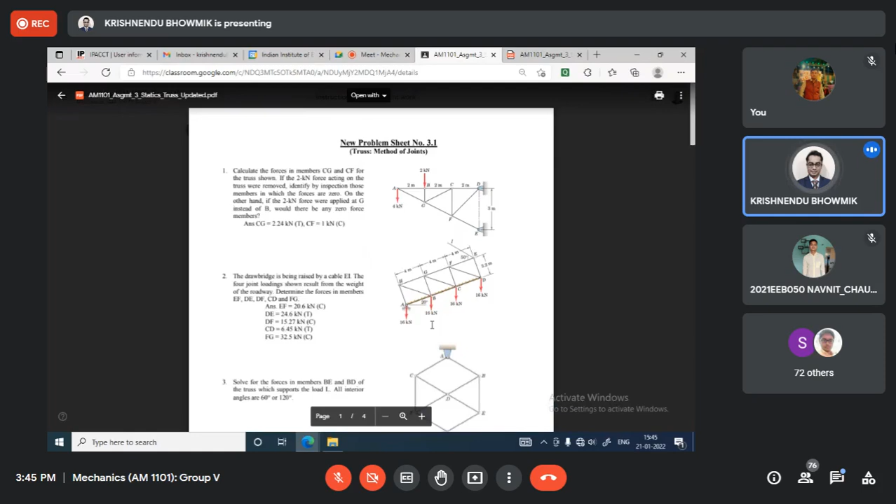So what I have given you for 3.1, this one, yesterday I gave the updated version. Actually it is 5.2 here, and it's supposed to be 6.4. By mistake it was 5.2. What happened is, in an earlier exam, we changed the data to 5.2, but to match these results, it should actually be 6.4.

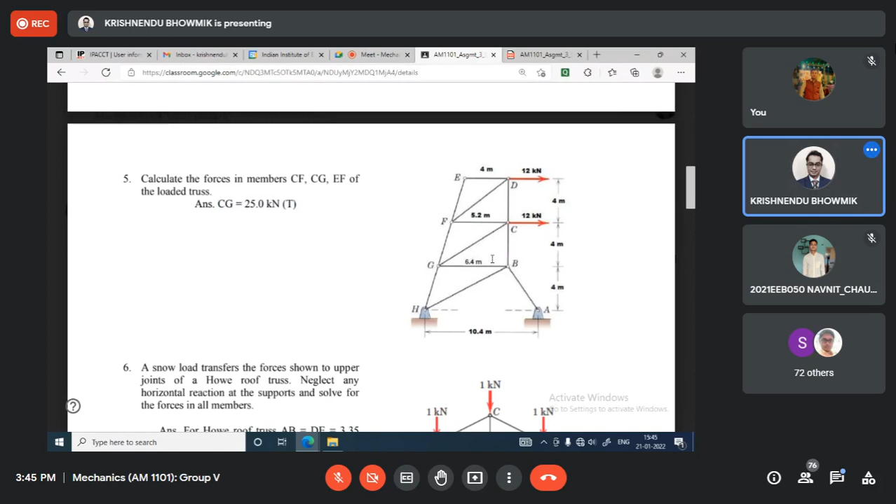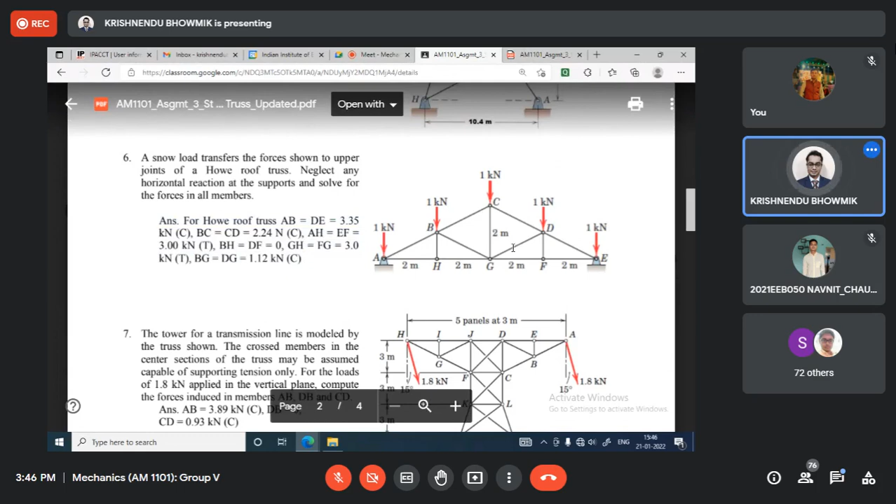Okay, that is one. Next, this figure is something else. Initially there were two problems, then we discarded the upper problem and the lower problem was like this. There are two problems here, one located at the top and one at the bottom, and whatever results have been shown correspond to this figure. So initially the figure was wrong, and I changed it yesterday night. This also is the same thing, 6.4 — it was initially 5.2, it's supposed to be 6.4. Based on that, you have to update your assignment if you have already done it, then change and update accordingly.

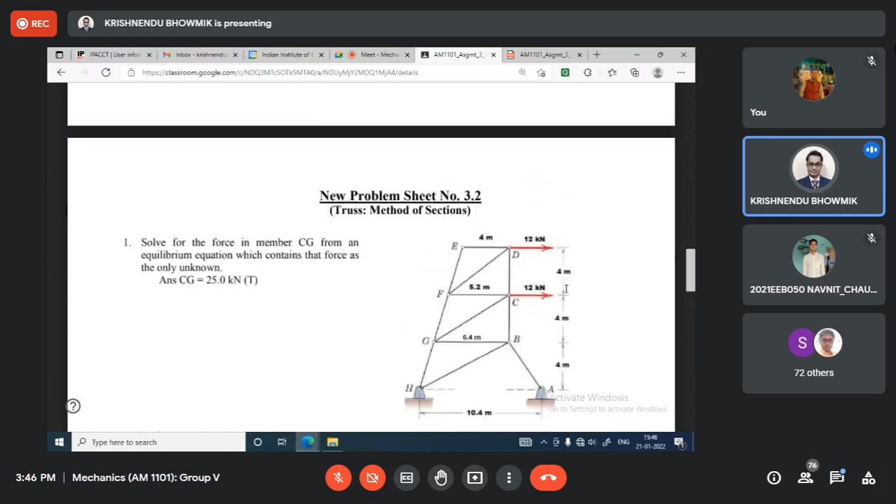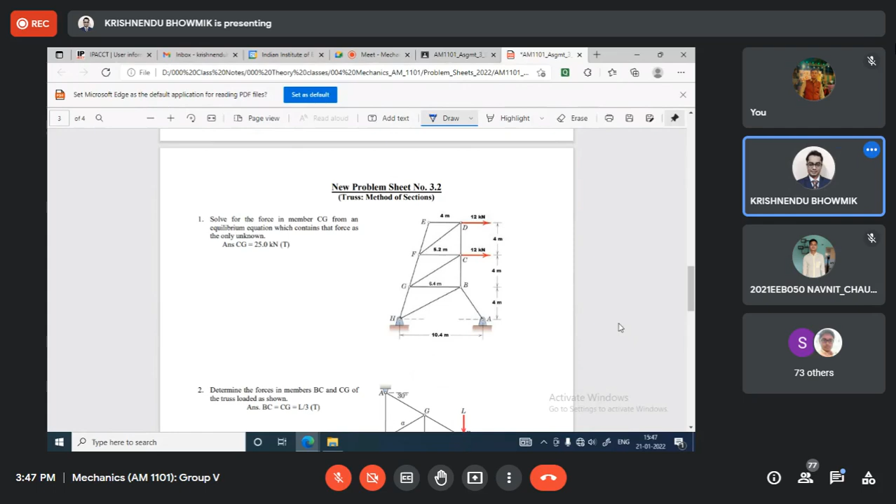Now coming back to problems 3.1 and 3.2, tell me what problems you need help with. Let me tell you what we did last time. This one is already done. Then problem 5, yes, already done. Then somebody asked about problem 7, so this is already done. Then I told you about this problem, already told. Somebody asked for problem 5 also, yes, this one already done. Now tell me, for problem sheet 3.1 and 3.2, what problems do you need help from me with? Let me know, tell me.

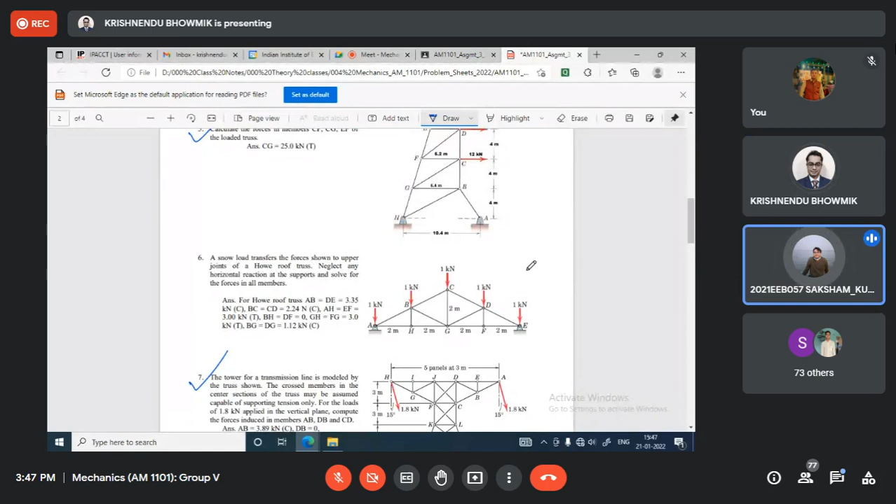Sir, I have a doubt in the sixth problem, 3.1. If we make the FBD of joint D, the horizontal forces will balance each other, so FCD and FDE will be equal from the horizontal force balance. But sir, the answer... No, that is true only when there is no external force. You have some misconception, let me tell you.

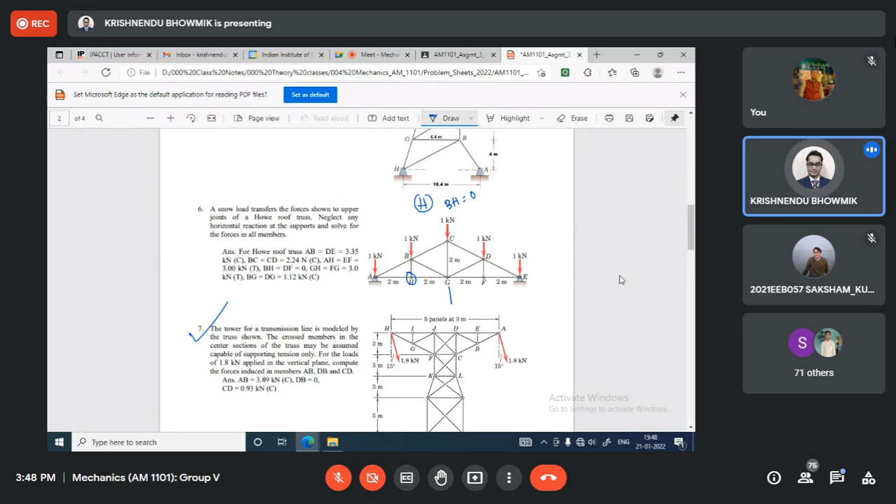For this problem, we'll start — just give me one minute, let me open the solution also. If we do a free body diagram for joint H, we get BH equal to 0. This is a symmetric problem, correct? This is the symmetric line. The structure is symmetric, and it is told to neglect horizontal reactions at the supports, so there is no horizontal reaction at A or E. So whatever value you get for this, the same value you will get here — this same value, that way you will get the results.

Now, if somebody wants to draw the free body diagram for joint H, BH will be 0. If somebody wants to draw the free body diagram for F, then DF will be 0. The doubt you told me — if this is 0, basically it is now like this, with some external force of 1 kilonewton here. This is the free body diagram of joint D: DE, DC, and DG. This is 0. Now, what I told you is that you're saying DG will be 0, correct, and these two values will be the same — that is true only when the scenario is like this, in the absence of any external force here.

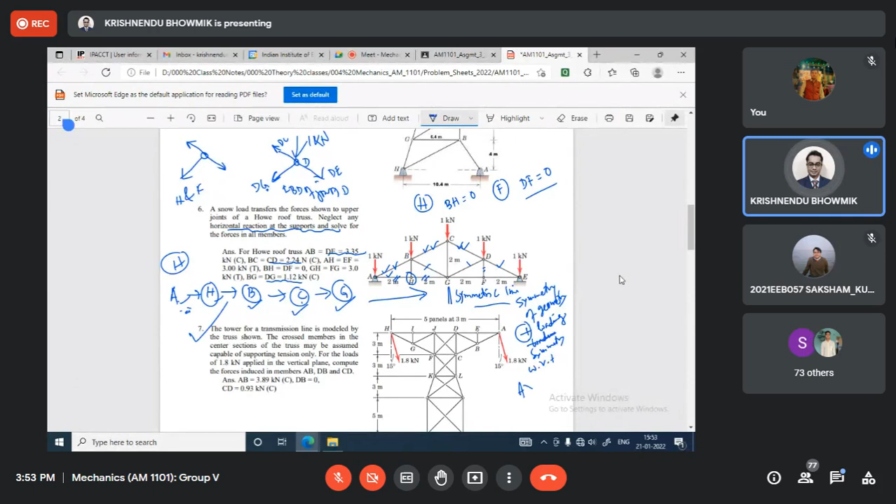This sequence you can go, and you can tell also due to symmetry of geometry, should write this one. If geometry is symmetric but load is not symmetric, then that will not be true. Due to symmetry of geometry and loading symmetry, loading applied symmetry with respect to axis CG, left side and right side portions, the corresponding symmetric portions and members will carry equal loads. That is one way you can save some time, but you have to be careful. Geometry must be symmetric, as well as loading symmetric with respect to some axis. Here it is some member, CG. That's why left side and right side are same. And loading symmetry means not only external load, it is true for reaction force also.

Symmetry, from where are you getting symmetry? Because geometry is symmetric. This 2 meter, 2 meter, 2 meter, then this is also 2 meter, and the angles are equal, symmetric angles, similar angles basically, and loads are all 1 kilonewton in vertical direction. So if you consider this line, then left side and right side it is symmetric. You solve it this way. Okay, any other problem you need help with?

Sir, in question number 7, how to find the force in member CD? On that day we discussed this, no? You see the last day's lecture, you will get that. We discussed it rigorously, I believe. Yes, somebody asked last day. Are you there in the last class?

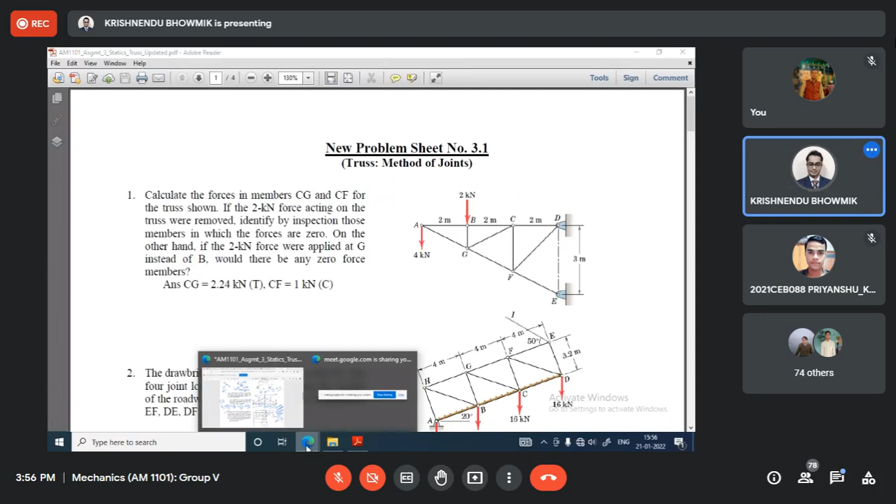A little bit of change or a huge change? Sir, huge change. Okay, let me check. Let me check, just a minute. Just give me 1 minute. Where are the solutions? Let me look. Okay.

Okay, which one did you tell me? This problem, correct? Yes. Okay, you check one by one. So what I did...

Let me check with this color. So as I told, the horizontal reactions are 0, it is given in the problem. So I want to take the moment equilibrium equation with respect to joint A for the entire structure. So what I have to do initially, I will show this only: I will remove the support and show the reaction force. Say AY is EY, then this.

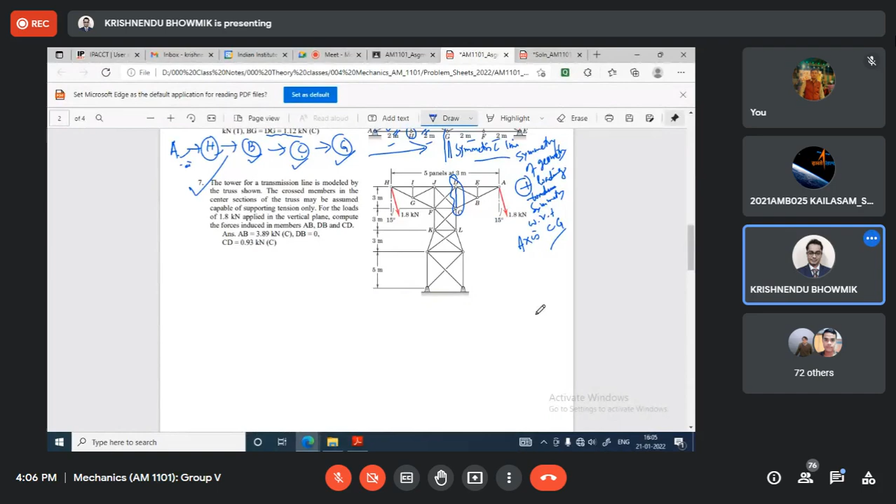Sir, is it okay to ask something for the previous assignment? Okay, I will go there, but before that we have to finish this first. Okay sir, okay, I will take that question, don't worry. Yeah, any other questions?

Sir, actually I think most of us don't have questions because most of us haven't started, there was no time for attempting this assignment. Okay fine, no problem, okay fine, fine.

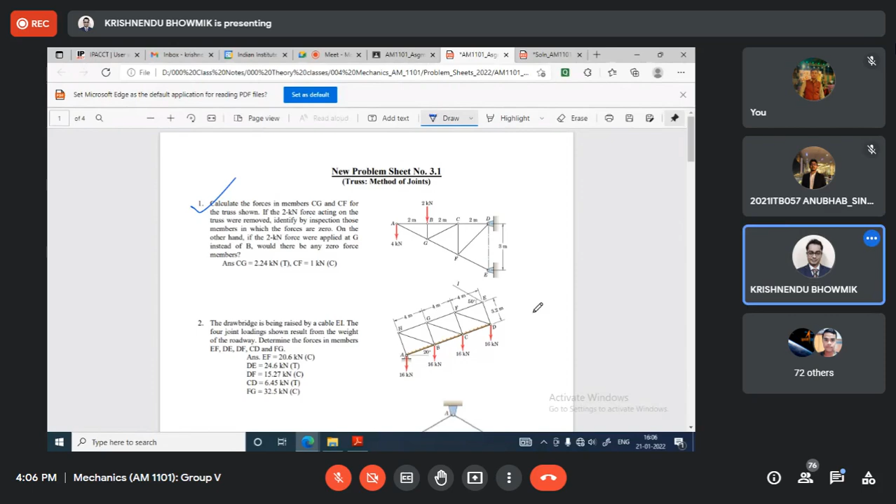So what I can do, I can quickly give you the steps for the solutions. All questions, yes, that will be very helpful. Yeah yeah. So one I have already done on that day.

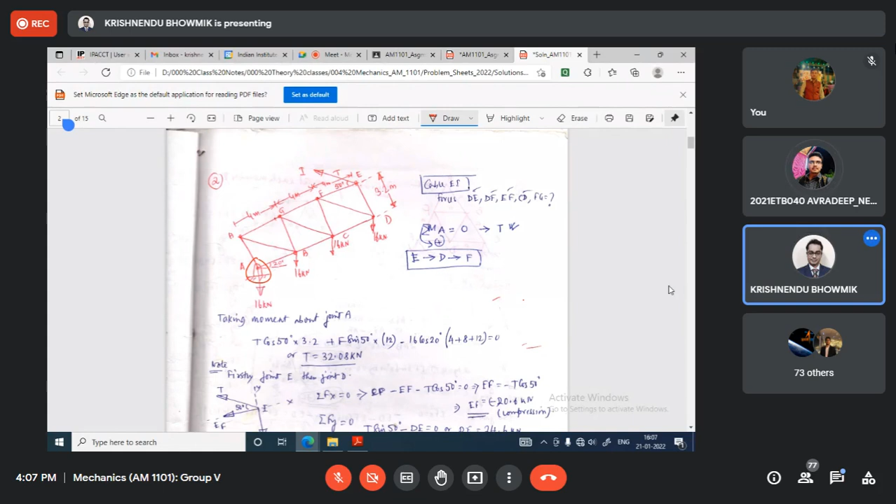For two, so this is the problem given, and you can see that it is having here one. Sir, is this all these trusses massless? That is the assumption at the beginning. Yes, it is massless. Okay yeah, so it is massless, that was the assumption.

So if I go there, this problem: the drawbridge is being raised by a cable EI. The four joint loading shown results from the weight of the roadway. Determine the force in the members. Some members given are EF, this one, and DE.

DF, CD, this one, and FG, this one. Actually in reality it is showing the 2D view, correct? But in reality it is a 3D view, like this. So if it is a roller here, there will be more roller here also, sorry, more rollers.

So if it is a 3D view, I want to write it. Give me, yes, so it will be looking like this, this way it has been. So if there's one line here, one line also will be here. It is showing here the 2D view, but in reality it is the 3D view, correct? So everywhere this roller will be there, this side will be roller. But we are showing this, we are projecting it like this, and this is the side view, and that side view is looking very simple, 2D view, two-dimensional view.

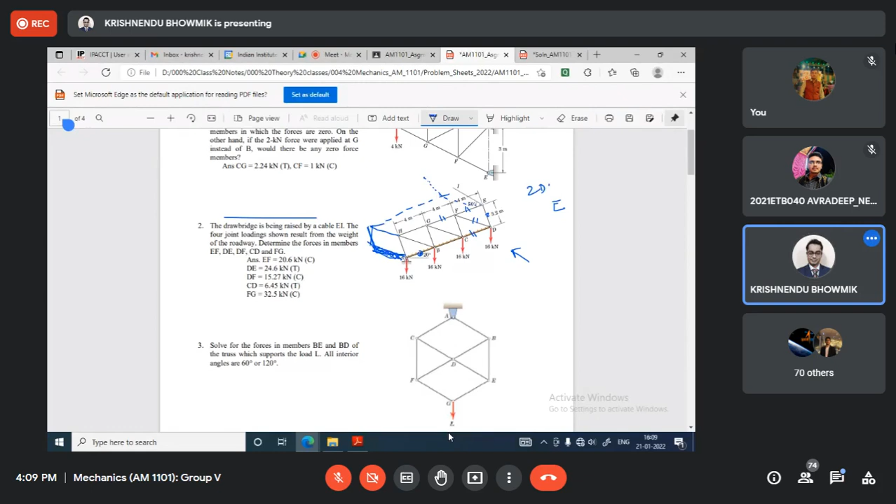Okay, now to solve this, first of all you have to draw the free body diagram. You can draw it for the entire structure, or even not. You start with the free body diagram of the entire bridge.

So if you draw the free body diagram of the entire bridge and take moment with respect to point A, and use the equilibrium equations, you will get the value of EI. This value you will be able to calculate by drawing the free body diagram of the entire structure. So what you have to do is remove this support and show this force, this is the reaction force.

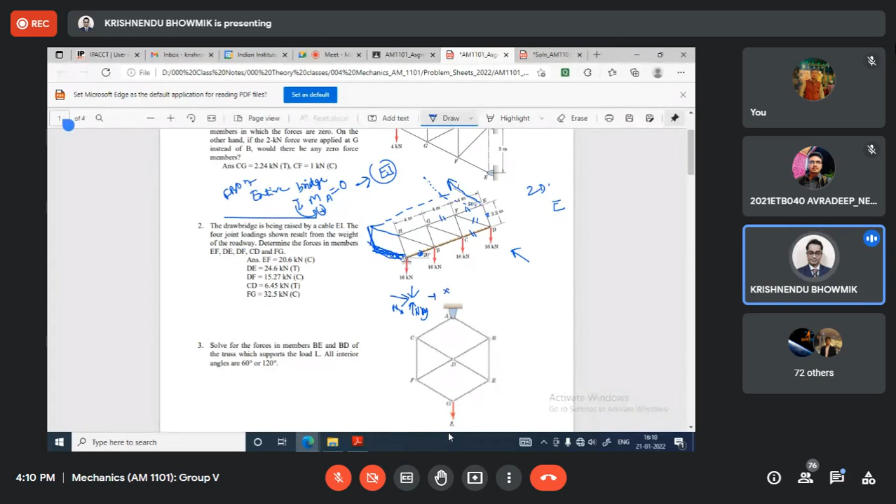Say this is NA, then another reaction force due to this pin, sorry, this is NAY, NAX, this is X, this is Y. Take the moment with respect to A, but you have to show this NAX, NAY, although you are taking moment with respect to point A, that NAX, NAY will not be used in the expression, but you have to draw the correct free body diagram. Then take moment with respect to this and you can find the value of EI, you can get the value of EI.

Once you know the value of EI, then draw the free body diagram for joint E, these two will be known. Then once you have done E, then you move to D, then this value will be known. Once you know this D value, then you go for the free body diagram of F.

You know this, and these two are unknown. So this will be the step: first, take the whole structure, remove the reaction supports, and represent by two reactions NaX, NaY at A. Take the moment with respect to A for the entire truss or bridge to get this value. EI will be known first.

Then draw the free body diagram of joint E. You will get two unknowns connected to joint E, the unknown forces of the two members connected there. Then move to D. The two unknown values, the unknown forces of the members, will be known. Then move to F, that is done.

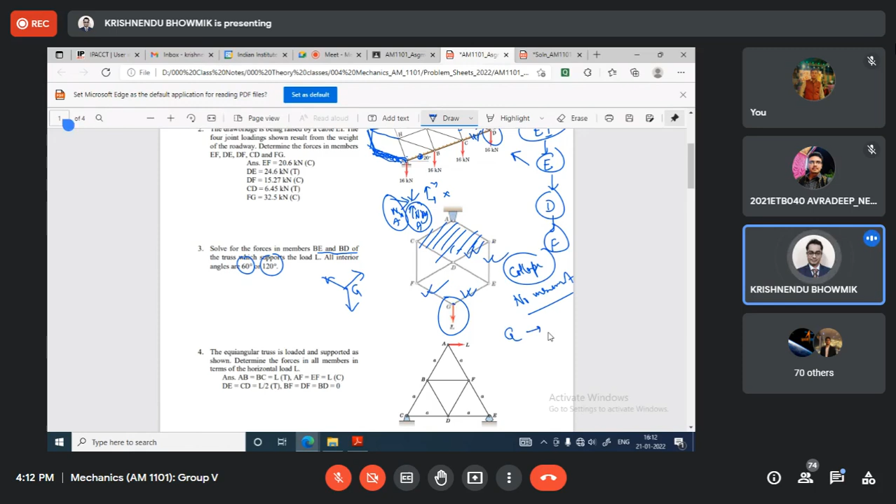Then draw free body diagram of G first, then move to E, because once this is known, these two can be known. Then you move to B, then this is known, this to be known. This is the steps you have to follow to do this, for these problems.

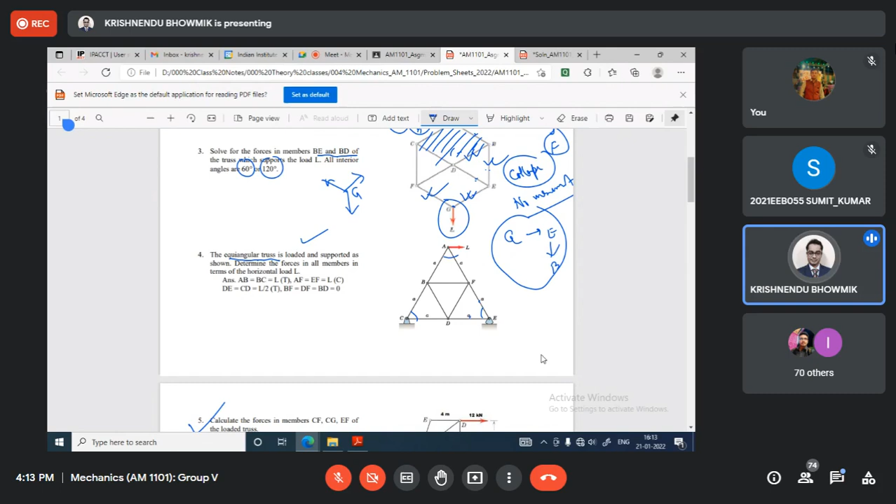Equiangular truss, all are given as A, that way it is given, correct? So equiangular truss, considering that one, if it is equiangular truss, what will be the angle? 60 degree. So if it is 60 degree, it is 60 degree, it is 60 degree, then these two are same. Then definitely it also will be 60, correct? All are 60 degree, you got that one.

So what you have to do, first of all, you draw the free body diagram of the entire truss. Here one direction, because you see this is roller, this is hinge. So this and this are the members. So this is C, this is E, this is point A, this is L, this is X, Y, N, C, Y, N, C, X, N, E, Y.

First, take moment with respect to C. Moment with respect to C equal to 0. NEY will be known, you know NEY. Then summation Fx, summation Fy will give the value of NCY, NCX. That portion is done, that means this reaction force you have already calculated.

Because this problem told you have to calculate the forces for all members, so the reaction force you have calculated. Then the step you can start with A, these two unknowns will be known then. Once A is done, then draw the free body diagram for E, then this and this will be known. Then you move on, free body diagram of E is done, correct?

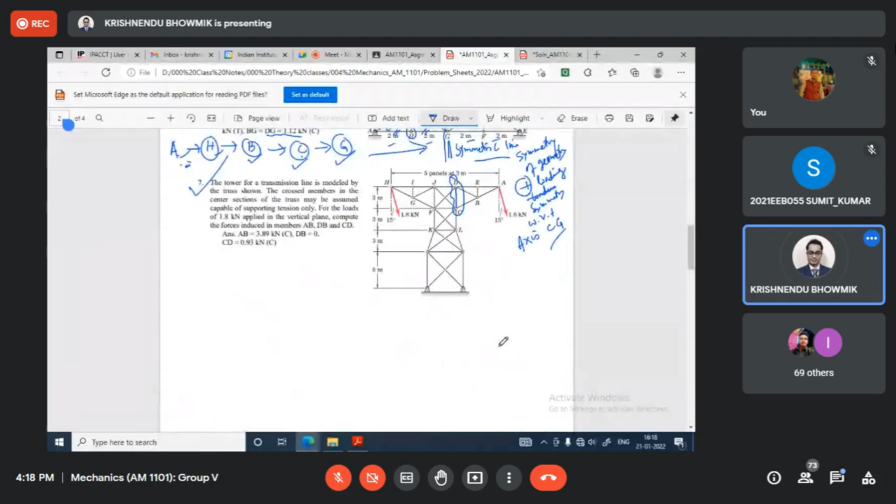For joint D, I will check the equilibrium conditions whether it is satisfied or not. As it is a joint, summation Fx equal to 0, summation Fy equal to 0 - whether it is satisfied or not, I'll check. So I'll write summation Fx equal to, say, 0.05 for example. We assume it's 0 because there will be some numerical error. 3 is done, sorry this is 4, 5 is done, 6 is done, 7 is also done. Now this is done, then I will come to this - this is moment.

Now after that, to calculate these two unknowns, what I can do is have some imaginary line which will cut the structure into 2 parts. But either I am taking the lower part or upper part. That free body diagram will consist of reactions from the supports.

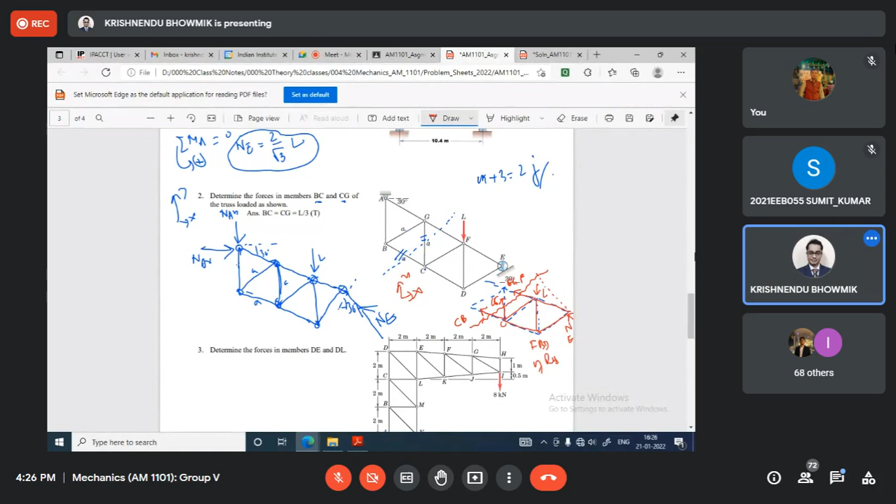Geometry also you know. Then this is x-axis, y-axis, FBD of right sectional part. First of all, take moment with respect to this point. Moment with respect to G, equate this to 0. This is moment with respect to G, then you will get CB value. Then use summation fx equal to 0, summation fy equal to 0 to get the other unknown.

Next you have to calculate the forces in member DE and DL. So what you can do is take one section here. Then this force will be exposed to scale, and I'm drawing only that portion. This is DE. This is E. You have to draw the entire thing on the right side.

And wait, one minute. Let me draw a little bit better way. Okay, this one, then this one. So this one is like this. So, and this maybe this is the cross section.

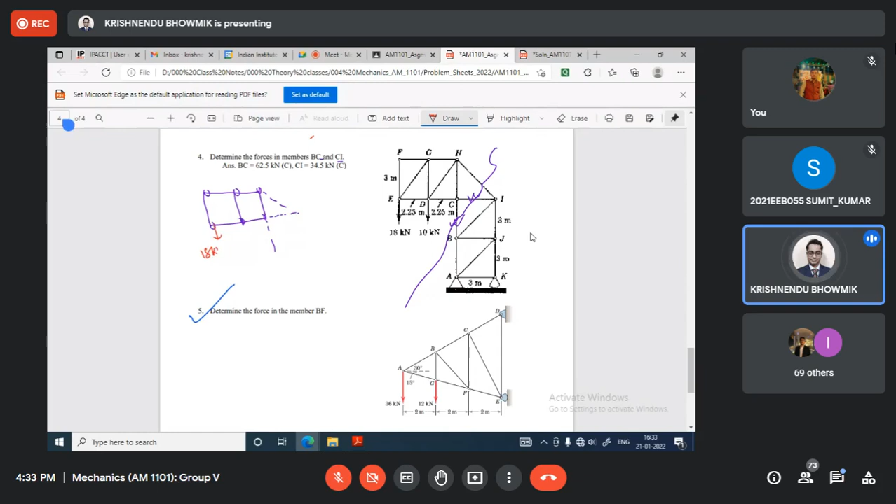This, this, so this is 18 kilonewton, 10 kilonewton, distance 2.25 meter, 2.25 meter, 3 meter. You have to give proper dimensions, the way you used to give this.

Then basically, this is the cross section, an imaginary cut. This force is HI, this force is CI, this force is CB, and draw some imaginary lines this way. These are the imaginary lines. This is J, this is B, this is I.

So you have to calculate BC and CI. You have to find out which cross section you want. You have to be very tricky - after taking the cross section, the unknowns will be exposed. Initially it was internal, now it will be external, exposed to the atmosphere, and the imaginary cut of the section will be such that the required unknowns will be exposed. That's why, targeting this BC and CI, I have taken this section.

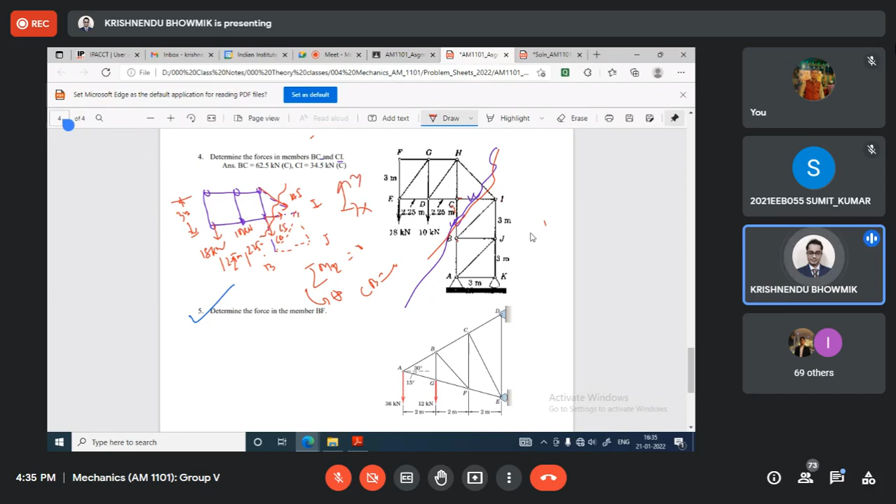Next is problem 6. For this, all are 45-degree right angle triangles, so one angle is 45 degree, other is 90 degree. By inspection, you can check this is 0 basically - you can understand. Now for this one, these are the cross members. There are 2 cross members like this. If you see from the side, it will look like this, here and here.

Now if you consider that a tensile load has been applied like this tensile force, this one force - you can assume that if you apply this tensile force, this will be tensile. Assume that FN is tensile, and if you apply this also tensile, GM. These two members are tensile. You assume it because the cross member is incapable of supporting compression. You assume these are tensile.

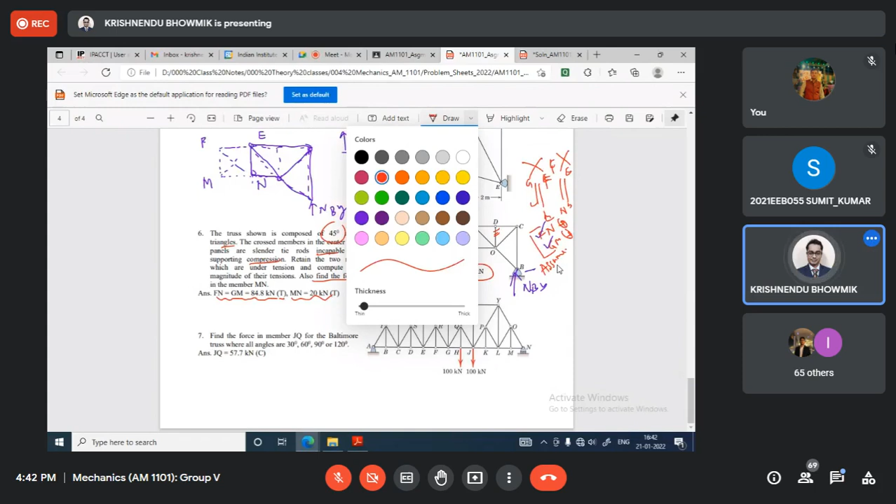Our assumption was Fn is tensile. So Fn is tensile means this is tensile. Then there will be another force, Ef, and this is our section. So another force will be Mn, and this is Fn. It is towards F, and it is towards M.

So summation Mf equal to 0. If you equate from this, you will get the Mn value. If you take moment with respect to F, you will get Mn value. Then summation Fx equal to 0, summation Fy equal to 0. That will give the Fn value.

Mn value, let me write this. How much you will get? Mn value you will get is 20 kilonewton tensile. Fn you will get is 84.8 kilonewton tensile. Then for the second one, instead of section 1, you take section 2.

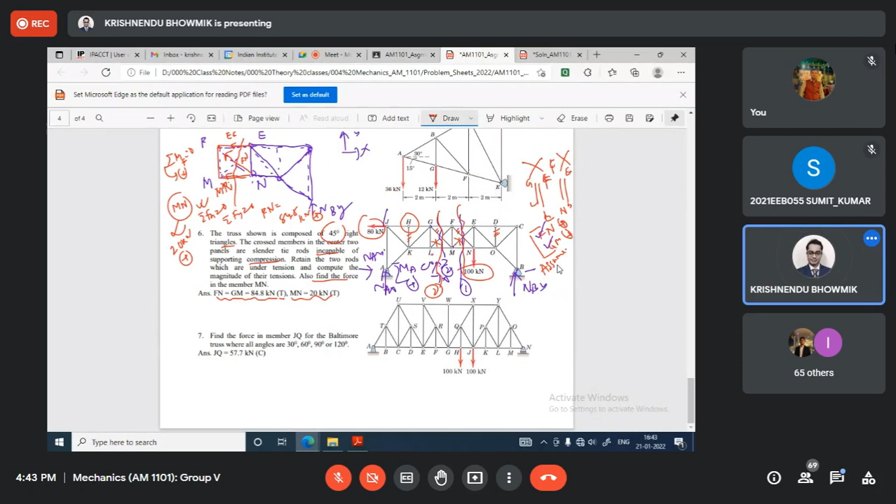A similar approach you can do, taking it from the right side. So what we will do for the second case, if I change the color for this second case... it will be continuous here. So the section is here. Draw this, and consider this section, maybe in a different color.

For this is 1, in that case nothing will be there, correct? And similarly, this point will be G in that case. So take moment with respect to G, you will get the Lm value. This will be Lm. Then summation Fx, summation Fy equal to 0, you equate. It will be Gm, and this force will be Gf.

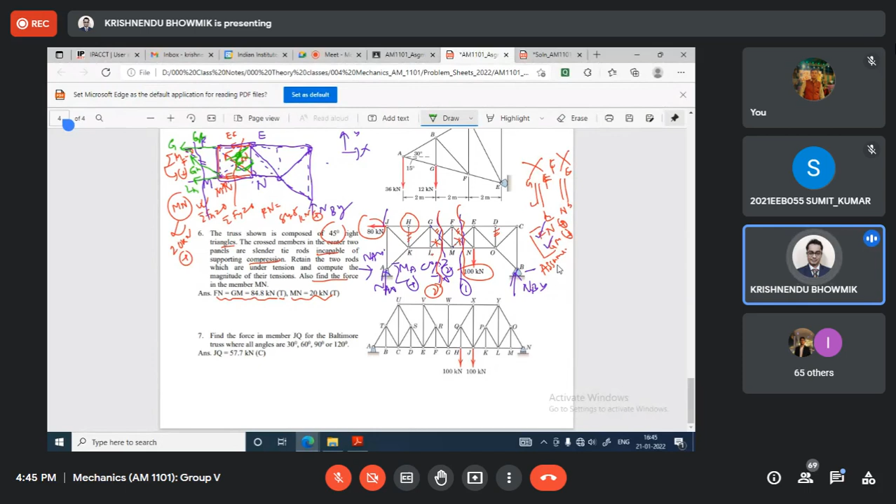Then you can calculate the value of Gm, and you can see the Gm value is positive, so that means you are correct. As the problem told, Fn and Gm you have considered as tensile, that is correct. Those forces are positive, tensile, so no need to reconsider. If it was wrong, any one of this, then you have to redo from the beginning.

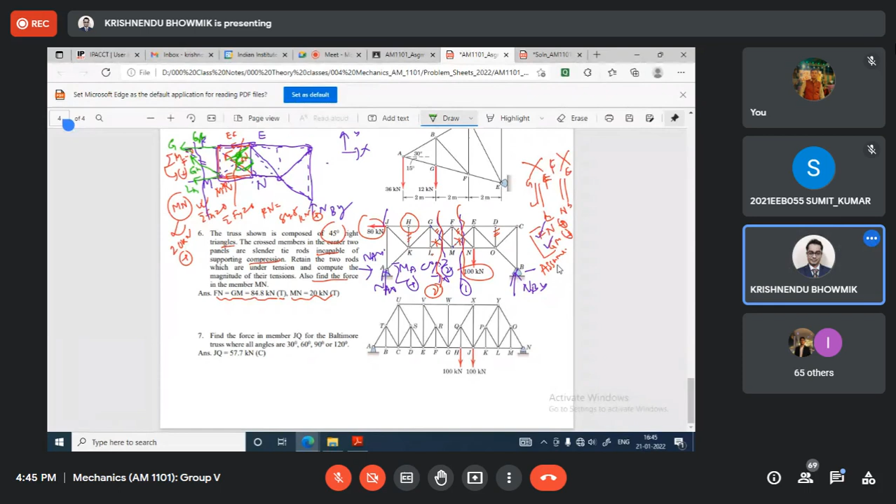Any doubt for this problem? Do you have any doubt? Yes or no? No response, that means no problem.

So for these problems, for the entire truss, you have to draw the free body diagram for the entire truss and get the reaction force Ny, then Ay, Ax. Ax will be 0. Ay will be from that free body diagram, you can calculate the Ay value also. Let me check. So you can calculate it; I don't have the solution now, but you can calculate the value.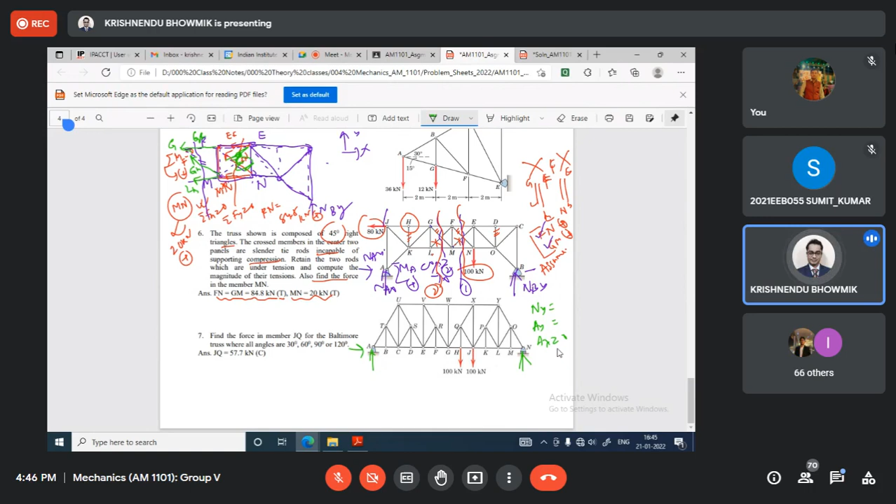Now next, it is told that angles are either 30, 60, 90, or 120 degrees. You can see which one is what. Now we have to calculate the unknown force JQ. What is JQ? This one, this unknown force you have to calculate.

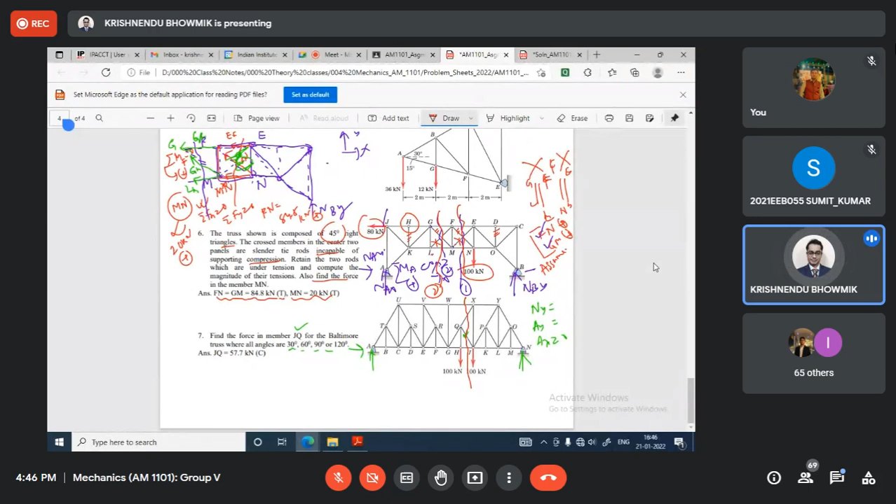Now, what we will do is consider only the right side portion. So we will take sections. I'll tell you, I'll take these sections. So this is the section. Now you have to tell me, if I take this section, how many forces will be exposed there? Students, you have to tell me how many forces will be exposed.

If I take four, yes, but we know the maximum unknowns we can calculate: one from moment balance and two from force balance. So the maximum unknown can be 3. So there is some issue. To solve that, what you have to do, initially we will take these sections.

Now how many unknowns? Section 1 has 3. Yes. And we will consider right side only, these portions. So now we have 3. So we can calculate GH, QG, and WX. These 3 we can calculate, correct?

Now consider, out of these 3, I want to utilize WX. Only calculate WX from section 1. Then use section 2. In section 2, this is known, WX is known. Now this unknown can be calculated.

Okay, that approach you have to consider. First take section 1 to get the unknown WX. Once that is calculated, then move to section 2. Then the forces will be exposed as WX, XQ, JQ, JH. Out of this, you already know the value of WX, so three unknowns can be calculated accordingly. Best idea to calculate that, you can take moment about M, J, G equal to 0.

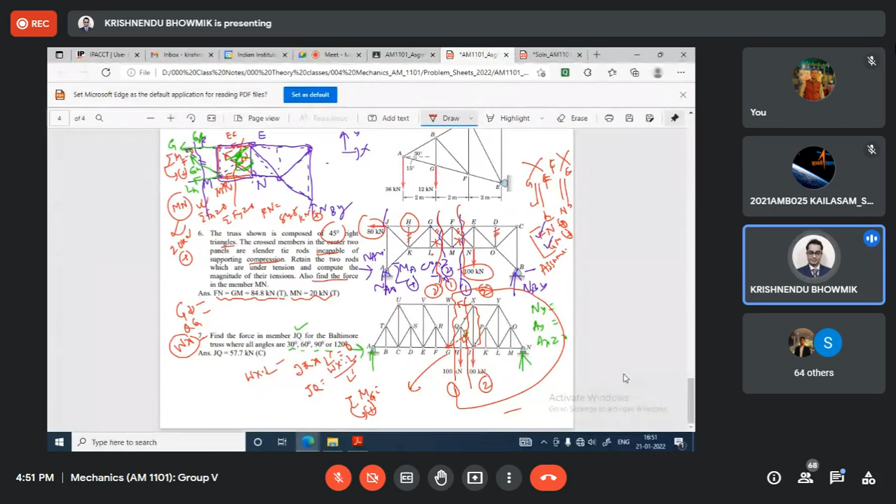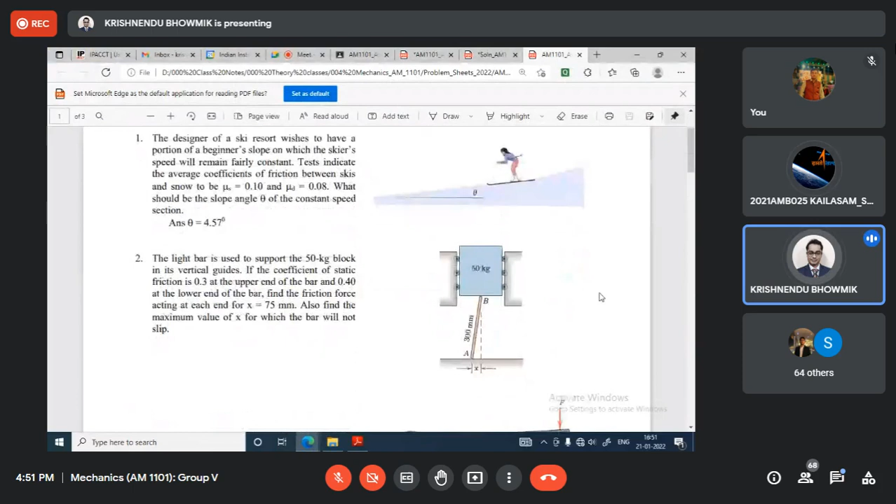I'll tell you, actually that surface, if we consider this point load, so surface is point load, 2D case, correct? Which problem are you talking about? Let me check, just a minute, because I may give some wrong answer. Let me understand your problem. Let me check, you tell me which problem. The second problem, sir, the rod AB. While looking at that I got this question.

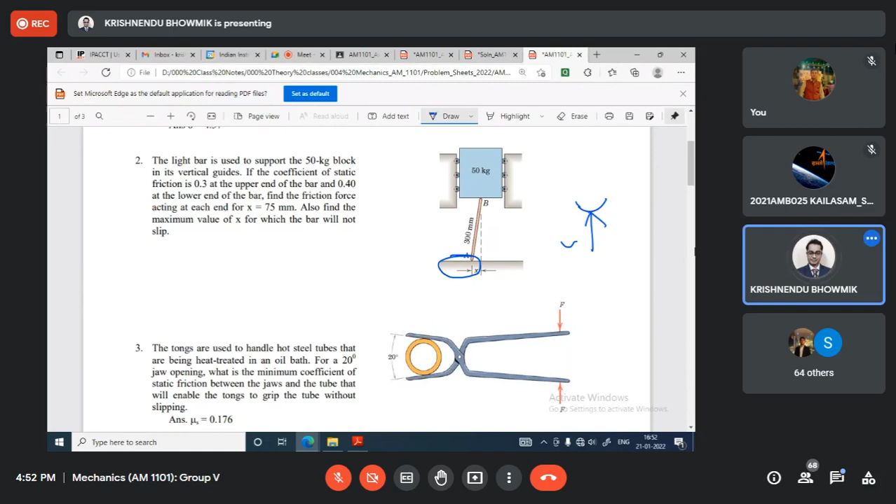You see, if you exaggerate, it is something like this, correct? So if this is the surface, if this is the bottom, then the reaction is this, perpendicular to the surface, normal to the surface. One is normal to the surface. If there are some frictions, according to get the equilibrium, or due to the application of the force, you can get the tendency of movement, whether static equilibrium, but there will be some tendency to have rotational or translational movement, and friction will oppose that. Other cases, sometimes friction is helping to have motion in some directions. So the equilibrium condition will give you the idea.

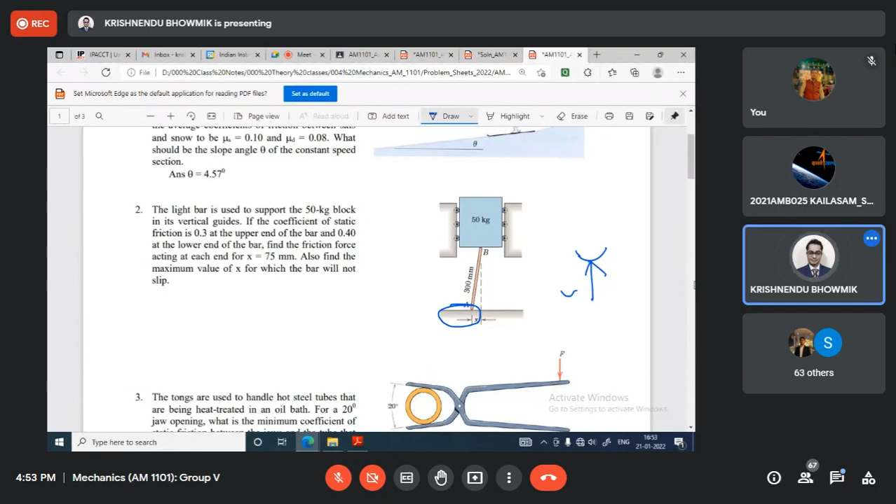So according to what I understood, at point A the normal reaction will be perpendicular to the surface? Yes. And the reaction force is equal to the sum of the normal force and friction force? Resultant of that, exactly. And I think the next question, sir, in the eighth problem, same assignment.

In this one, we are supposed to find the tractive force from the tires on the horizontal surface. Could you please explain what that exactly means? Actually, see, the target is...

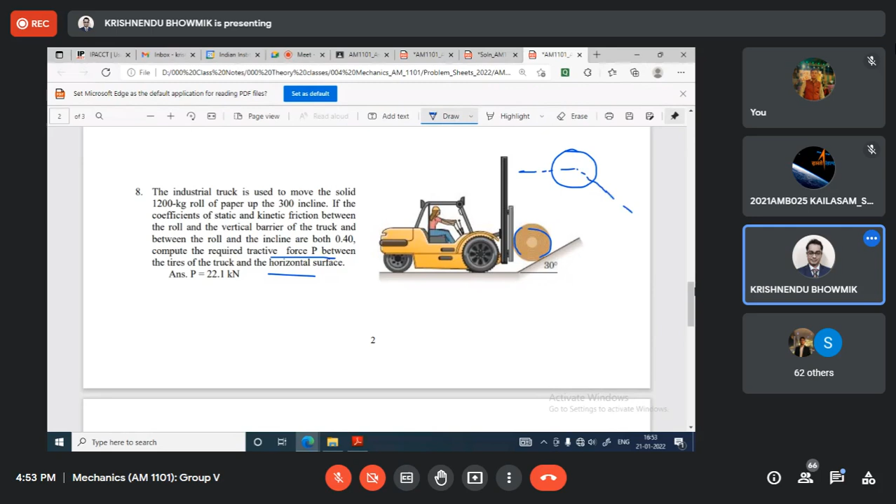We have to lift this block. So to do this, one is this reaction, other is this reaction here, correct? Now if I draw the free body diagram of this structure, basically if this is giving the force here, there will be some reactions for this structure. Truck. So if this is the reaction force like this, there will be some self weight, so it will be balanced like this, balanced like normal force.

There will be some friction like this, friction F1 and F2, and if this is N, so it is F1 plus F2 minus N will be 0, summation Fx equal to 0. That indicates F1 plus F2 equal to N.

Is it not? Yes, sir. Actually, this is N, and this is N, this is also N. Whatever force that industrial truck will impose in horizontal direction on the paper, this is 30-degree inclined. This is a roll, it moves a solid roll of paper. Whatever force is imposed by this truck will give reactions of the same amount, adjusted with this frictional force. And this is P.

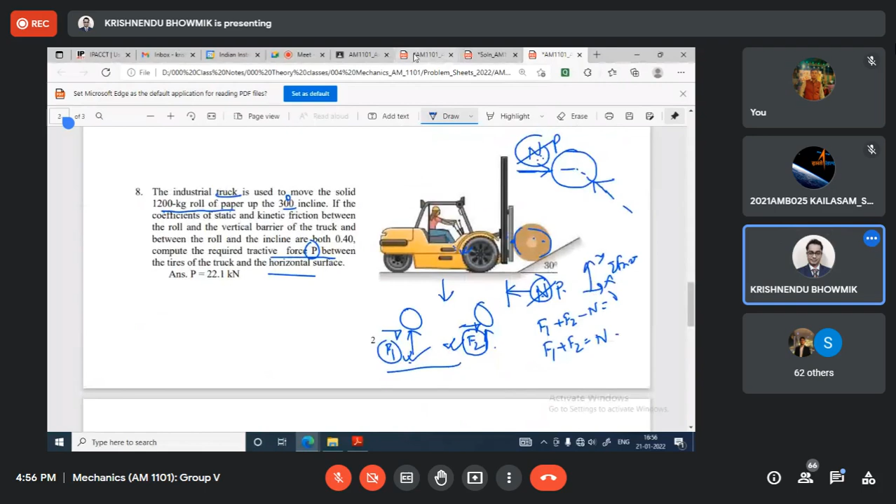So guys, I think we're almost 10, 15, 20 minutes ahead of time. Very good, I have finished the syllabus. Now if you have any doubt, we can discuss it now regarding the exam.

A general question, sir, regarding the exams and the preparation. Sir, during your classes, I would like to make some notes. So could you suggest what exactly should we make notes of? What points should we note down? Okay, actually, whenever I am discussing any of the problems, I believe you must have pen and paper.

Whenever I am explaining some new topics, first of all you write the topic name, then some expression I am writing, correct? Quickly, you can draw those free body diagrams because those are very important. If I'm explaining something, quickly note down the meaning, the gist of the explanation, or else the second option is that after class, very carefully, with your headphones, you listen to the lectures. Stop if you are not able to understand, go back once again, listen to that, take your textbook, the Meriam and Kraige - from there mainly this assignment, this study material has been created.

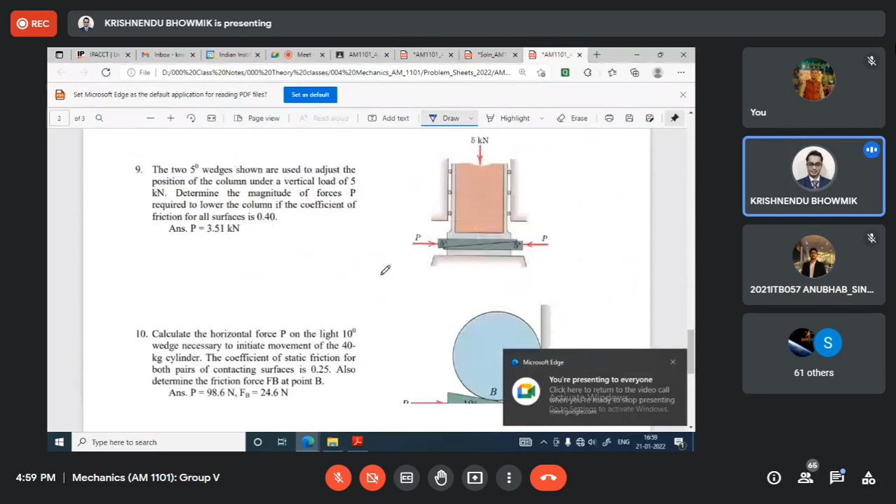Okay, sir, friction - can you please show number 12? Yes, thank you, sir. Yeah, this one. Okay, I have not explained this before. Okay, no problem.

So what is happening - you try to understand that only the couple has been applied at the lower cylinder. Both are 20 kg cylinders, which will allow them to roll slowly down. It is not moving up, although some couple has been applied, it is moving down, slowly moving down the incline. The coefficient of static and kinetic friction for all contact surfaces are given, point 0.6 and 0.5, mu s 0.6, mu k 0.5. You have to calculate the couple M that is applied to the lower cylinder.

Now you can consider, in this type of problem, at which location slipping will start - A, B, or C. There are three places that are contacts, correct, as a whole. So you have to consider which place the slip will start. Let me draw the free body diagram one by one. So this is one, this is two. Okay, this is basically A, and this is B. So as per the problem given, we can expect some reaction force for this.

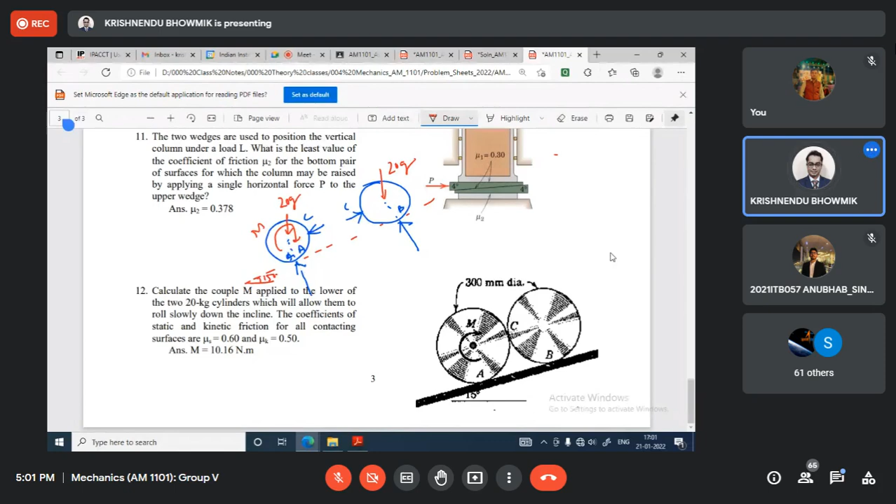Now this couple has been applied here, couple M, and it is moving slowly down. If it is moving slowly down, then friction force should act in which direction? Upward direction. So we are expecting that friction force is acting in the upward direction.

So friction is, this is F1. Okay, this is F1. Now, and this is say F3 friction.

Now, if it is moving down, then which direction is friction supposed to act here? See, maybe here - which direction, upward or downward? Sir, on wheel B the friction should be upward, and on wheel A friction should be downward.

Okay, because you want to take moment balance here, correct? For moment balance, that is also true. You are right. If you take moment balance, it is confirmed. This is anti-clockwise, this is clockwise. You are true, whatever you are thinking is also true.

So this is F2. Okay, this is F2. So I write here the F2, not here, this F2. Now the question is, have we drawn the free body diagram correctly?

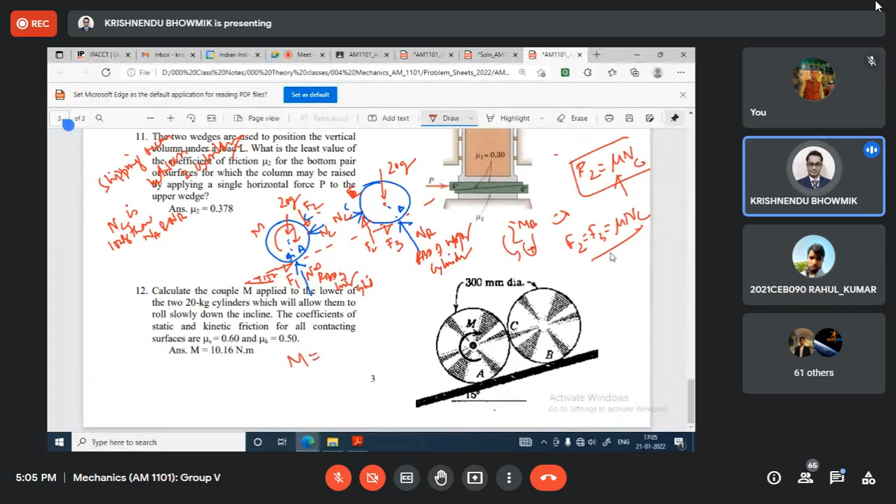So what you have to do, whatever free body diagram you are getting from this one, you have to equate everything. Finally you will get all the unknowns, and this torque will be F1 minus F2. F1, F2, there will be some difference multiplied by R, because when you take moment with respect to this point, you can see N2 is passing through that, N1, NA, NC is passing through this point, NA is passing through that one, weight is passing through that one. So F1 minus F2 multiplied by R.

R is the radius, 300 by 2 of the cylinder, sir. We are taking the torque about the center of mass, right? Yes, CG, yes, yes, center of mass. That's why that moment, whatever couple you have applied, that is basically F1 minus F2 multiplied by R.

So if you can calculate all the unknowns from these assumptions, with the correct free body diagram as I have shown, then you have to consider only one case, that is the limiting case, F2 equal to mu NC, since slippage will start between the two cylinders. Then take moment balance, moment equilibrium for the upper cylinder to get these expressions, and you will get the other expression. Finally all unknowns you can calculate, and you can have this couple value.

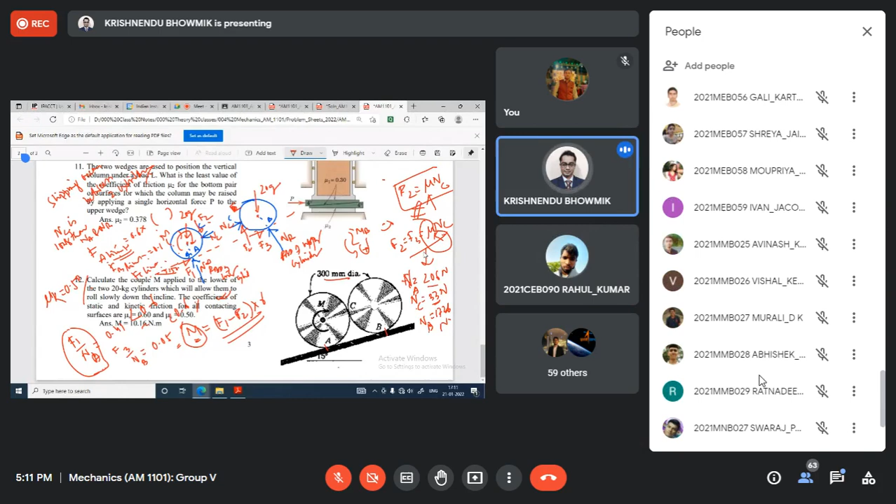FA equal to basically FA equal to F1, FC equal to F2, and FB limit is F3. That way also you can show that slipping will start only at point C. That was our initial assumption. That is correct. If you are wrong, you have to redo this.

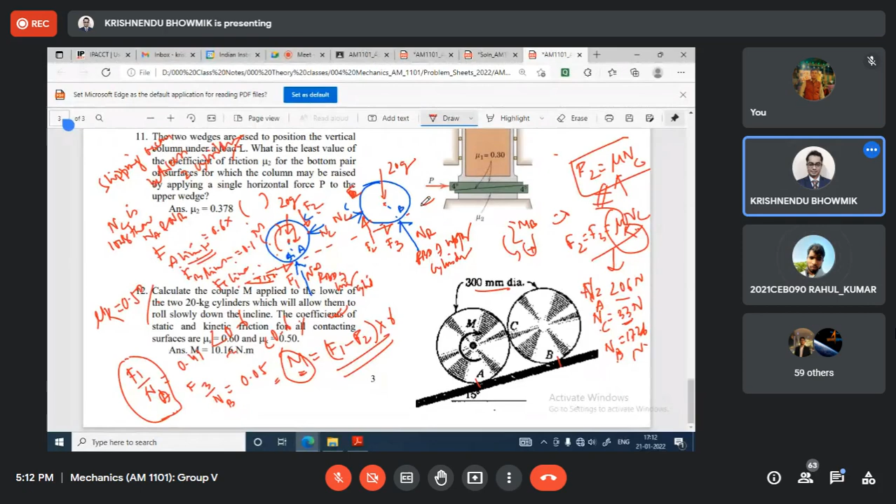Okay, any doubt? No, sir. Okay, fine. Then I can stop presenting.

Okay, sir, yeah sir, I have a doubt, sir. In truss problems, should we write the expression in all problems first, that m plus 3 equals 2j, so the equation satisfies that the body is internally rigid? So should we write that?

Yes, question. Rahul, your mic is on, could you please switch it off? Yeah, somebody, yes, everybody should mute yourself. Rahul, you can mute yourself.

Now the question is whether in your answer you have to give that or not. It may not be required if I am not asking you. If I ask it in the question, then only you can provide it. But that is why I told you to check it on your own, it will give you confidence that if it is a deficient structure, you cannot take the moment. That idea will be revealed from that expression. But in questions, it is not mandatory, though if you are confident, in a short time you can give it, it will be an added advantage.